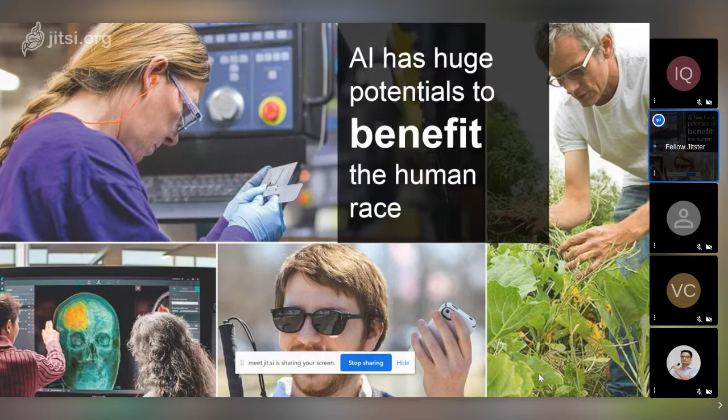So why go very far? Let's take a current example, how AI is combating COVID-19. AI, artificial intelligence, or machine learning, or data analytics, is accelerating the research.

Even before, there were influenza or swine flu like conditions, or pandemics that happened. Having said that, in the current situation of COVID-19, each newspaper, every digital media platform, each news channel, they are completely speaking on descriptive analytics, predictive analytics, on what would be the projection, or prescriptive analytics, how we can take care of things.

And I can proudly say I'm working with one of the Indian state governments to provide all this COVID-19 related analysis. And last week, the Government of India appreciated the work we do for that particular state.

So in terms of combating COVID-19, it performs very well across stages like detection, prevention, response, recovery. In terms of detection, we get early warning, detecting anomalies and digital smoke signals like BlueDot, then diagnosis, pattern recognition using medical imagery and symptom data, etc.

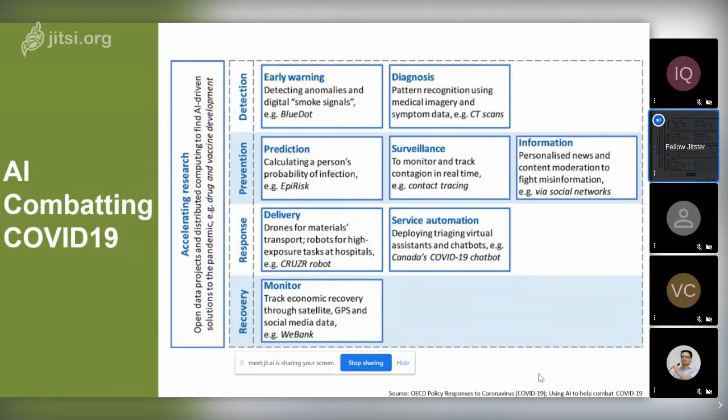So what are the trustworthy AI requirements, the requirements we can trust upon? First is accountability, where there is accountability and AI required, that's trustworthy. Then human agency and oversight, then technical robustness and safety, then privacy and data governance. We need to make sure that sensitive data we are working with should not get leaked. Then we should have transparency, then diversity, non-discrimination and fairness, then social and environmental well-being.

So it needs to be continuously evaluated and addressed throughout the AI system's life cycle.

So that's the clear and crisp trustworthy AI requirements. Now I'll move to the next, much more interesting part. So as of now, we have covered what is artificial intelligence, what we can do with it, and the requirements - whatever situation we are currently facing due to artificial intelligence, we are able to manage our work and manage many things. So that's how AI works.

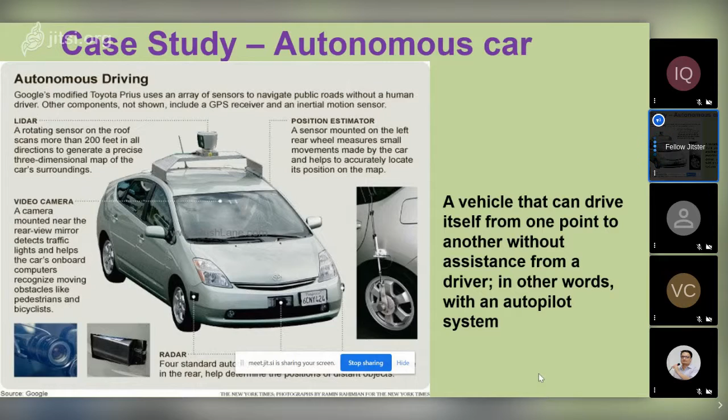Components of autonomous car. First is the GPS. It gives the position of the car using satellite in a map like Google Map. The map gives information about upcoming intersections, traffic report, directions, paths. That's how GPS works.

Whenever we are traveling or walking, if we have a GPS-enabled system like Adidas or Fitbit, it tells us how many steps we have walked, or if we are driving, the traffic report tells us not to go through the shortest route but a longer route if it has the cleanest traffic with no congestion. Then for direction, even if we don't know an address, we can quickly enable Google Map, type the address, and navigate towards it.

Then the lidar, it's nothing but light detection and ranging. It's the heart of the autonomous car. It is a rotating sensor on the roof producing a laser beam that scans more than 200 feet in all directions. It makes a precise three-dimensional map of surroundings.

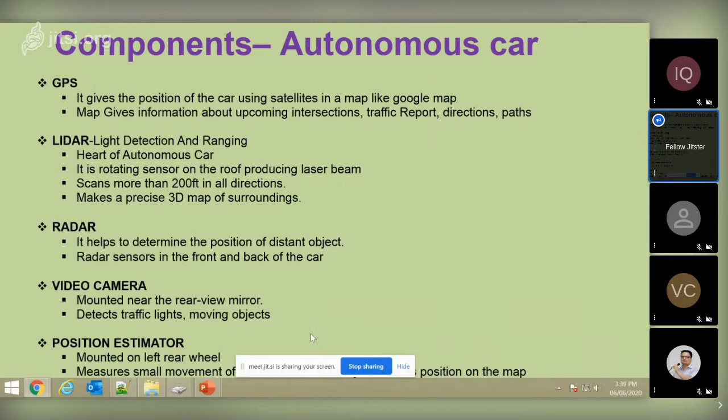Then we can move to the next point. So as a mechanical engineer, instead of fearing, we have to remember: machine rules the world, but we rule the machine.

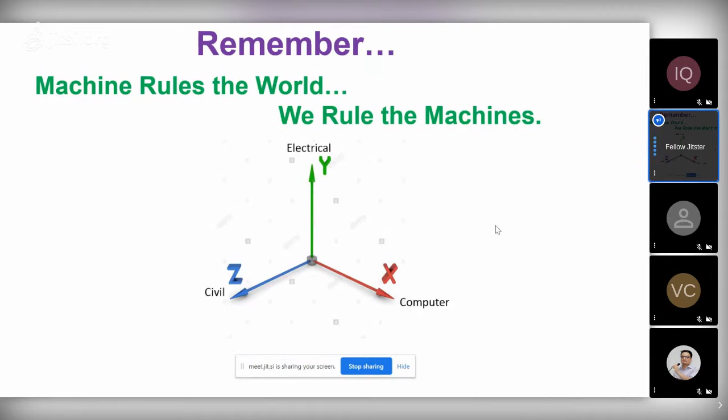If x axis is computer, y is electrical, z is civil, then don't scare - we are mechanical engineers, we are the origin. Mechanical engineering is the origin. When mech rests, world rusts.

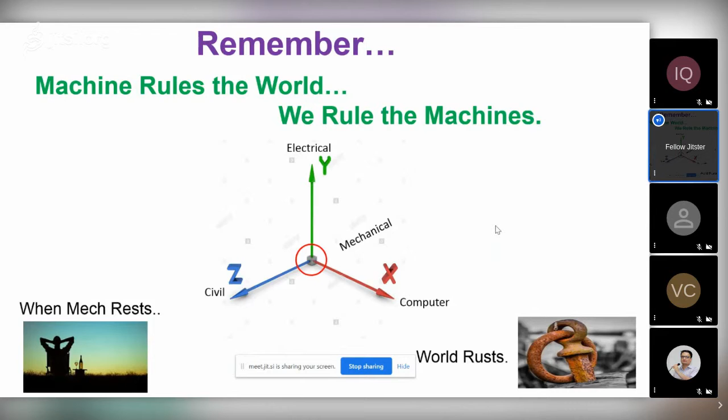So here comes the artificial intelligence section. To begin with, there are some of the top 10 online courses. First is Machine Learning certification by Stanford University, available on Coursera. Then Deep Learning by Andrew Ng, Coursera.

AI for Everyone by Andrew Ng, again on Coursera. Artificial Intelligence certification by Columbia University, available on edX. Deep Learning by IBM, again available on edX.

Artificial Intelligence A to Z: Learn How to Build an AI, available on Udemy. Artificial Intelligence for Beginners, a free course on LinkedIn Learning, the Lynda platform.

Then we have advanced AI tutorials: Deep Reinforcement Learning in Python, on Udemy. Then we have an Artificial Intelligence course on Reinforcement Learning in Python. And another one is the Artificial Intelligence certificate course by Microsoft, again available on edX.

These courses not only give you learning and knowledge about artificial intelligence, but also give you the idea about what are all the different parts of artificial intelligence, what are the basics, along with industry expert services and organizational certificates.

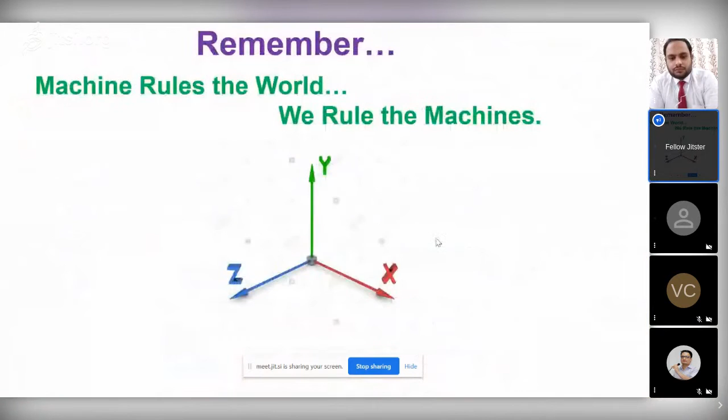Thank you, sir. The next question is: how much time will it generally take to master data science?

There are master programs starting from 6 months to 2 years. It depends on the person, how quickly he can learn. But I don't think it's a lengthy process. Even within 6 months, we can enter into the data science world. What we need is to understand the data, to play with the data, and to build models out of the data.

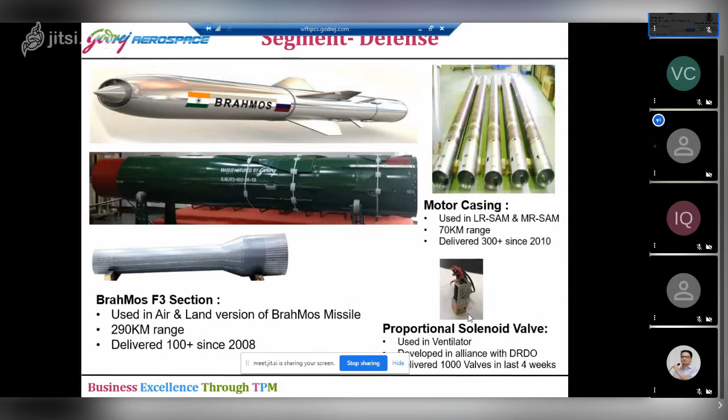Now the second segment is we are manufacturing for space.

We are manufacturing engines for the space program of ISRO, and we have supplied near about 100 plus Vikas engines. Then another 75 kilonewton thrust engine for GSLV. First one is for PSLV vehicle, and third one is the CE20 engine, which is also very huge thrust, 200 kilonewton thrust powerful engine we manufacture.

And now the semi cryo engine, which is 2000 kilonewton thrust, is under development in our plant. So you can see all the PSLV, GSLV vehicles successfully launched the space program of ISRO, and we have pride that in Chandrayaan and Mars mission our engine worked successfully with the parameters decided by scientists. So for these programs, Mr.

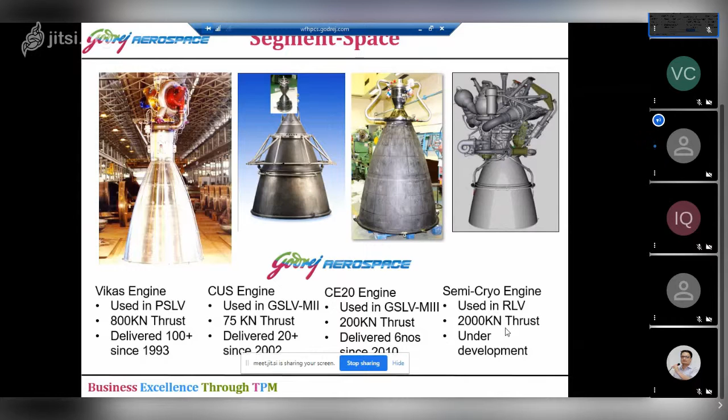Abdul Kalam also visited our company, and that is one of the pride moments for us. Then the third segment is the domestic and international aircraft business, where we are supplying the precise assemblies which are in the slide - the tubing for aircraft, actuators, brackets, sheet metal assemblies, pod assemblies. Rafale is one of the super aircraft, and in that the pod assembly is fitted. So many areas we are working in.

Now we just entered the composite segment, because the metallic manufacturing is different, but now in the latest technology of aircraft this segment is very important. We entered into that. Now recent development, you see this actuator - that actuator is a very important part of the Tejas project. We supplied the actuators and they worked successfully. So indigenous actuators we are now manufacturing, and they are supplied to defense.

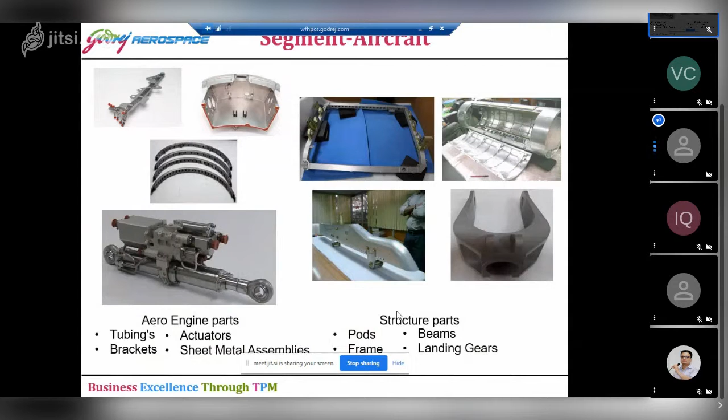So it is very proud to work here in Godrej. This kind of prestigious product we are manufacturing under visionary leader Mr. S.M. Vaidya, who started this division and grew it from 2-3 engineers and a small group. Now it is 700 plus people we are working together with expertise in manufacturing, where we are expert in process designing and process architecturing of precision parts manufacturing.

We have a huge customer base. We are supplying to ADA, ISRO, HAL, BrahMos, Bharat Dynamics - like that we are supplying to Indian prestigious companies where research scientists are developing the products which are manufactured and supplied by us. At the international segment, we are working for very prestigious customers like Rolls-Royce, Rafael, Moog, Safran, Honeywell, Boeing, Eaton, and GE.

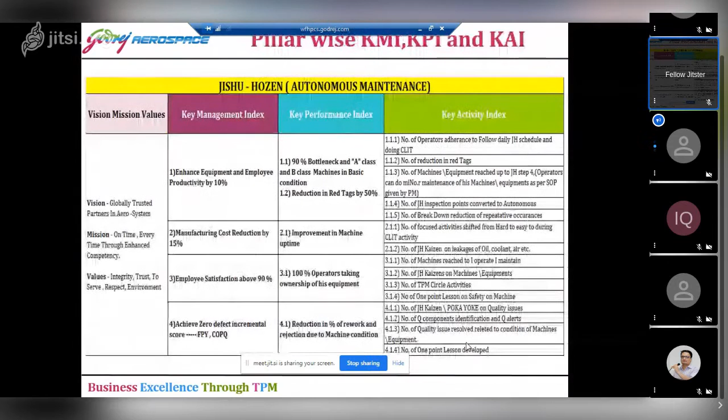All those activity indices are part of the KRA goal of people at the TPM circle level and at the management level, and those are all reviewed weekly, consistently supporting people to improve in that area.

In TPM, the target setting process's main targets are in terms of PQCDSM -- those are the measuring parameters. In PQCDSM, we recorded the existing condition, because we know the philosophy that whatever can be measured can be improved. If we can measure something, then we can improve that thing. On that basis we mapped the world level targets, the benchmark, and what the target should be.

Then we prepared the master plan to implement TPM. This master plan, which we prepared in 2009, was implemented as it is -- there was no pushback, backlog, or change in the plan. Nothing happened differently; whatever we thought in 2009 Q3 was implemented exactly as planned. That kind of dedication and commitment was shown by our people.

To engage 700 people in one go, and to make them think in terms of dual responsibility terminology, was a very challenging thing.

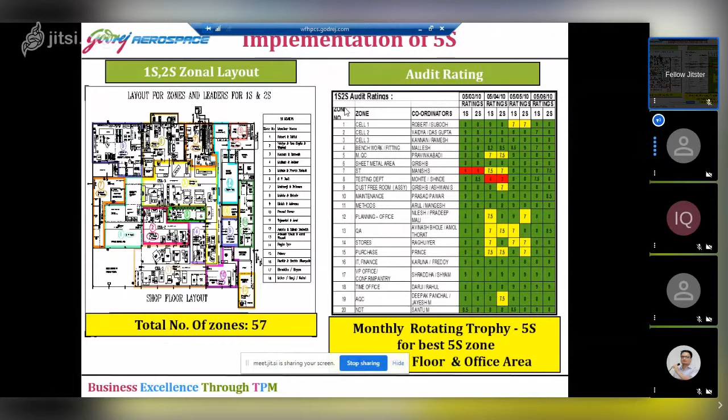So there is no man's land in our company. Everywhere we know which is the area and who is the owner. That is very easy for management to monitor the things.

Now, whatever available resources we have, we done 1S activity, the unwanted materials removed, and developed systematic arrangement for keeping the tools. So tools in shop floor, we have more than 10,000 fixtures, different type of fixtures and tools, and gauges, templates. We are using it in very huge quantity. So to identify and keep all those required resources, and it should be available in good condition, that was the requirement. So 5S was very helpful for us to achieve that.

Then first pillar is Jishu Hozen pillar. It is autonomous maintenance pillar, or in Marathi we are saying it is Swayam Dekhbhal. So how we are taking care about our body. Our body is also one of the machines. So we are very conscious about our body.

But on which machine we are working, whether we are very connected with that machine, that level of ownership to develop in the people, that was the challenge, and we successfully implemented that. Our people now think that I operate, I maintain, I make, I fix. So the minor maintenance people learned to do. So that kind of change happened because of this pillar implementation.

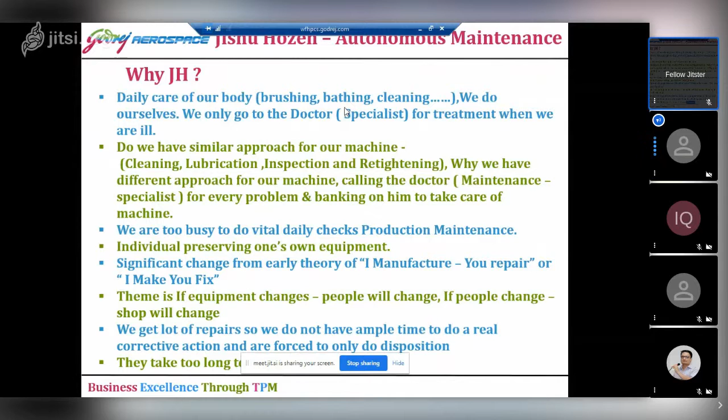One or two machines we retrofitted, because those machines were very old, 35 years old. So management took decision to bring that machine to zero breakdown level. We invested something, and we achieved zero breakdown on those machines also. So this is the manager model machine.

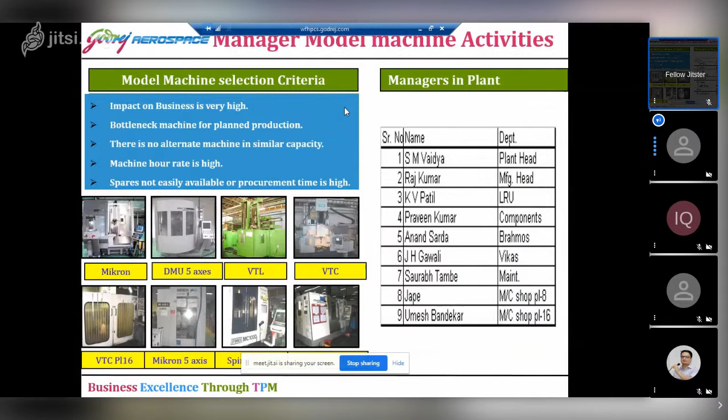Manager first, from our top management, the entire DMC worked on those 8 machines. You can see all those are model machines, where we learned the concept and terminology, and understood how to take care of the machine. As per the JIPM, JH pillar standard, we learned the things, and that same thing we percolated down, and the people learned and adopted the knowledge and skill to take care of their machine. So this is the model machine activity.

Now JH pillar, the ownership of the operator to take care of CLIT activity. So cleaning, lubrication, inspection and tightening. These four things are very important as per JIPM standard. JIPM says that if you continuously monitor and continuously take care of the machine with this CLIT terminology, then your machine will not go for breakdown.

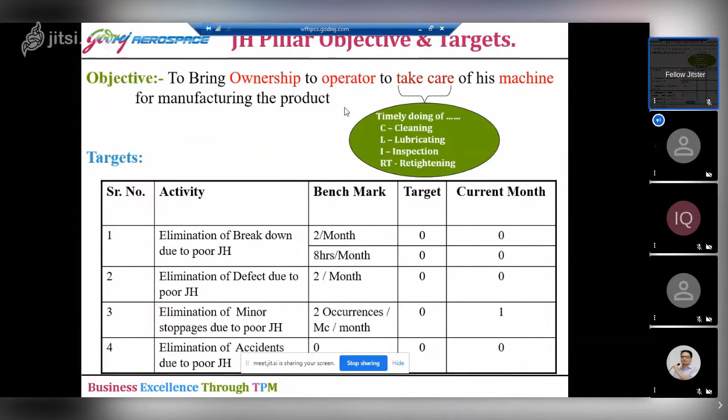It will be at the basic condition, and if you do more on that machine, it will reach the optimum condition. So the machine builder even doesn't think about that machine's condition, but that level of maintenance condition monitoring you can maintain on that machine. So it is a step-by-step terminology.

In every pillar, there is a team of people. In JH pillar, all the machine shop people are participating, where on every machine, old or new, we are implementing 7 steps. Those 7 steps are step-by-step implementation: initial cleanup, countermeasure against sources of contamination, formulation of CLIT standard, overall inspection, autonomous checkup - all those steps are implemented on the machines. And the JH chairman certifies the machine, and we are monitoring it again and again with those steps. So till step 5 we implemented on most of the machines.

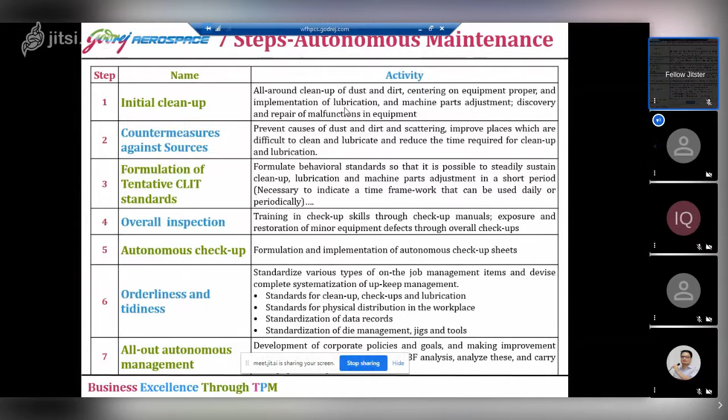Here you can see some examples, there are 7 types of abnormality as per JIPM standard: minor flaws, unfulfilled basic condition, inaccessible places, contamination sources, quality defect sources, unnecessary non-urgent items, and unsafe places. So once you open one of the machines or equipment, you will find out those kind of abnormalities in the machine, which were not there when the new machine arrived in the plant. At that time those things were not there, but because of people's behavior, habits, or ignorance, so many reasons are behind that the machine is not taken care of as per the machine builder specified requirement. So the books coming with the machines are kept in the locker in the cupboard of the maintenance department, and they are not aware and not interested to maintain the machine at zero breakdown level or condition mode.

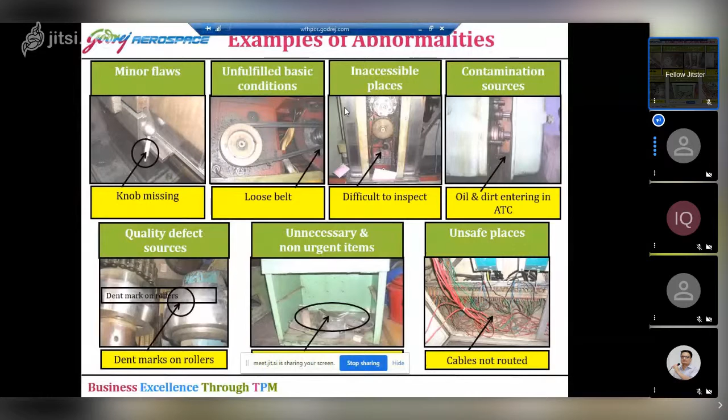So you can see a lot of abnormality we observed and corrected - near about 3,500 abnormalities were corrected, roughly speaking. So maintenance department and production people did a tremendous task at that time.

Then good-to-find cases - there are some abnormalities related to 3 bad: breakdown, quality, and defects. Breakdown, accident, and defects - so these 3 bads should be controlled. If we ignore all those 3 bads, it will lead to machine breakdown.

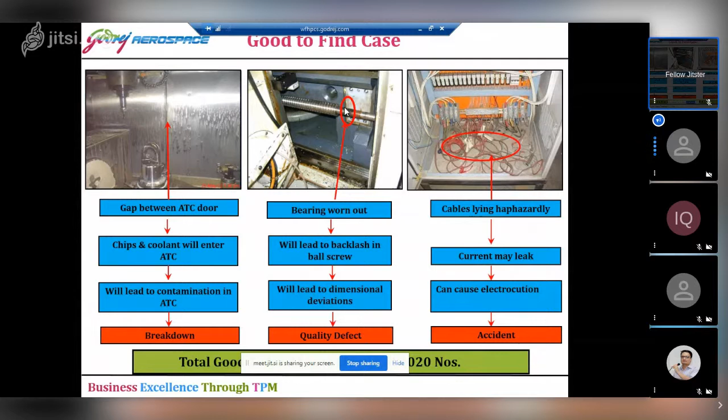So timely responding to the condition of the machine is one of the important factors. Good-to-find case is one of the areas where we found a lot of things in the machine that were not taken care of earlier, because of lack of knowledge or lack of policy - we didn't have that much stringent mechanism. But because of this TPM implementation, we developed a structured implementation plan. So now if a problem comes, we know what the solution is and how to, who will take care and who is the owner of that problem.

So sources of contamination is one of the areas where the contaminant is. The reason behind failure of machines or equipment is because of contamination. The things flowing in the machine should be channelized properly. If some oil or some chips or some dirt is accumulating in an area where it should not go, that is the contamination area, and that source of contamination should be arrested.

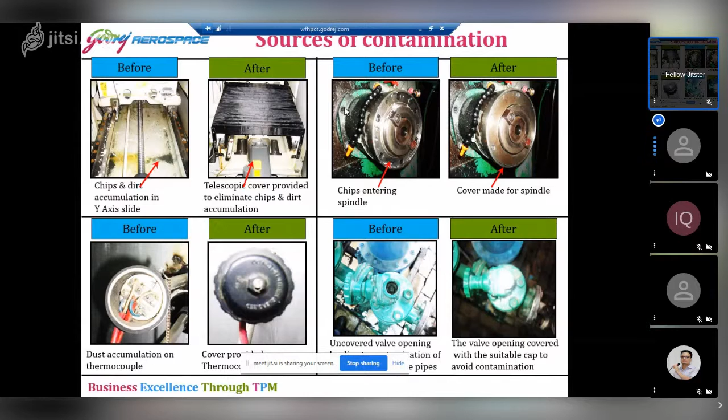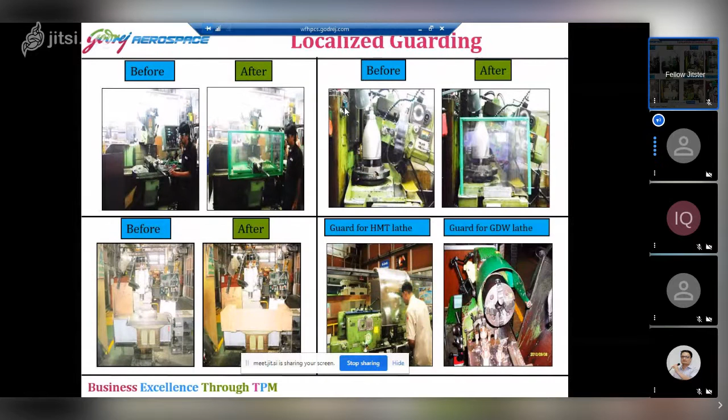So next step is countermeasure against sources of contamination. Then we design and develop some localized guarding, so the cleaning time and safety precaution is improved in the machine.

Then visual indicators. Now on the machine, the person was not aware of what he should do. He is aware of operating the machine, but not competent enough to understand how to take care of his machine. So those visual indicator stickers are pasted.

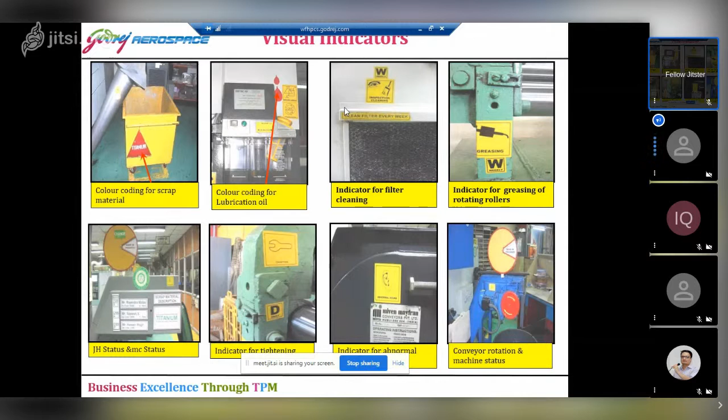The list of daily JH checklist we prepared, and that checklist is designed as per the machines and with maintenance people's help, and that was implemented on all the machines.

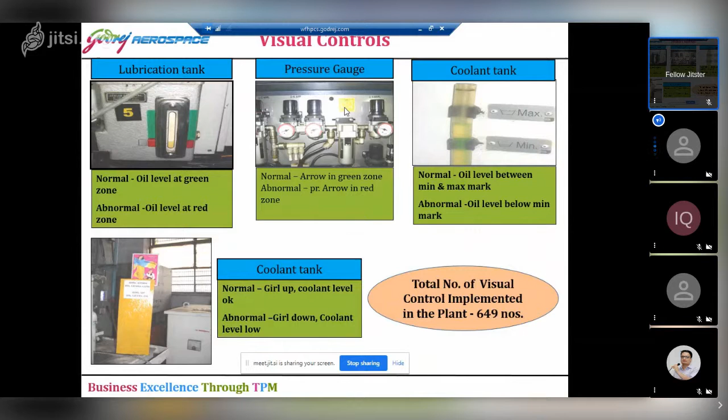Then visual controls - there are inbuilt machine controls in the machines, pressure meters, or upper-lower level indicators in the machine. So those indicator markings should be clear and neat. In the daily round, the operator will observe and note down if the oil level is low, then the action for him is to pour in the oil. So that kind of improvement we did on the machine.

Visual management - those are some improvements that were not in the machine as provided by the machine builder, but our people developed this visual management, and that was one of the creativities. They said that because of that creativity, their attachment with the machine and involvement was improved.

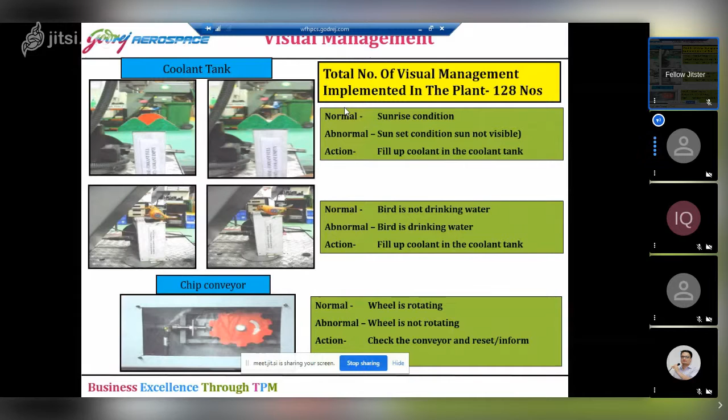Then those are the audit points. If the machine passes, the JH chairman will sign that the machine has passed step 1 audit. Like that, step 1, step 2, step 3 - the auditing process is established in the company.

Then JH step 4 - in step 1 to step 3, the operator changes the machine and machine condition, but from step 4 onward, the machine changes the operator's mindset, because the operator's competency enhancement program is started. The operator was given 7 trainings: fasteners, drive mechanism, hydraulic, pneumatic, bearings, basic electrical safety. Those kinds of topics were taught by experts. So we created a dedicated training center in our plant, and all the people were educated.

Now we created some models. On those models, people understand the hydraulic and pneumatic mechanism. So this is one of the formats we - JIPM recommends - the 'know-why' sheet. Why is there a breakdown? We should know this breakdown is because of this reason, that it was not taken care of with the appropriate requirement, and the standard procedure was not followed.

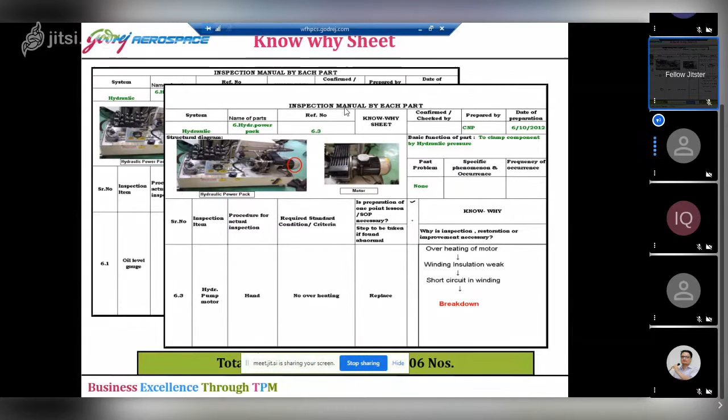So it is related to breakdown, quality, and defects also, and safety also.

The second pillar is the Kobetsu Kaizen pillar. This pillar is the backbone of TPM, where we measure the overall equipment efficiency, overall human efficiency, and overall plant efficiency. There are standard measuring parameters and calculation tables available.

We should establish the system of data collection in the company, so we established a strong data collection mechanism. In our ERP system, we enter all the data through 8-hour booking done by people. We extract that data into an Excel sheet, and one Kaizen or improvement done by me and my colleague was setting up a macro on the Excel sheet. By pressing one button, we get all the OEE data of the machine, whether for a group of machines, daily, weekly, monthly, or whatever time range you decide. So manual calculation is eliminated.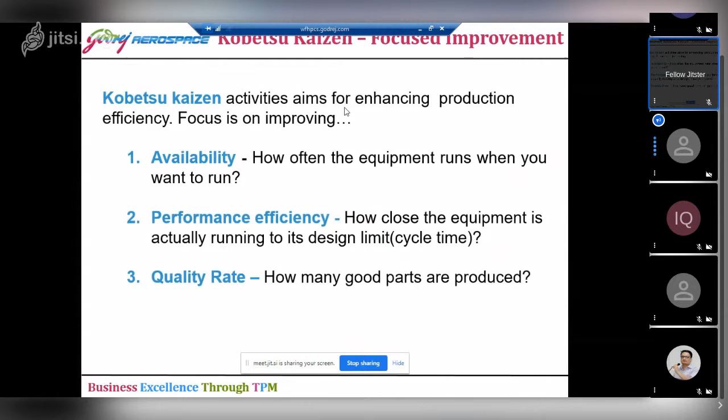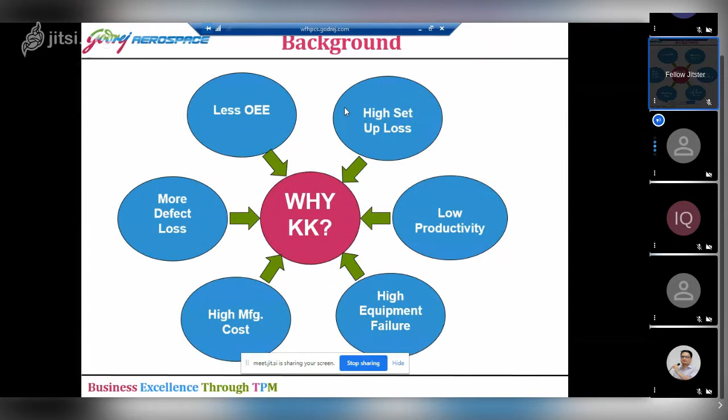Why is the KK pillar implemented in our company? Because OEE was less, setup loss was high, productivity was low, equipment failure was high, manufacturing cost was high, and defect cost or defect loss was high. These are very important factors we should monitor.

The objective was to maximize equipment efficiency for carrying out the process at reduced manufacturing cost, because we are in a project-based industry environment where things are not well set. We are establishing the parameters in the process architecture. Every time, the challenge was that the cost of the process, in all aspects - variable cost, consumable cost, fixed cost - every cost is very crucial for us. Because of this KK pillar implementation, to some level we achieved control on the cost through cycle time monitoring and non-value added activity monitoring and control.

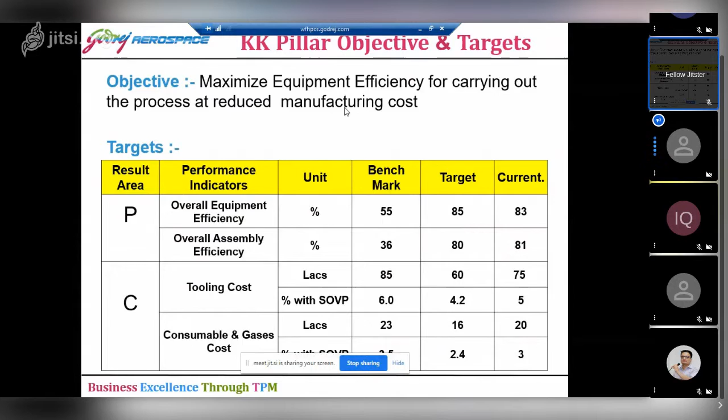You can see this is the standard table given by JIPM, Japan Institute of Plant Maintenance, where all types of losses are captured in 16 types of losses, and their relation with a particular pillar is shown.

So losses 1 to 7 are affecting the overall equipment efficiency. If we control or monitor continuously and improve the things, your OEE will improve. So those 7 losses are very important in the company. If you are going to implement the KK pillar, those 7 losses should be taken care of.

KK sir requested that I talk on this topic in more detail. Equipment failure loss - if a machine breaks down, it will directly affect the top line and bottom line cost of the company. Then there's setup and adjustment loss - without doing setup, we can't produce anything, so setup is essential.

But what should be the setting time on the machine, or whether we can set offline, or develop and implement a quick change or automatic setting mechanism on the equipment or process - that is the process architecture level we are thinking about.

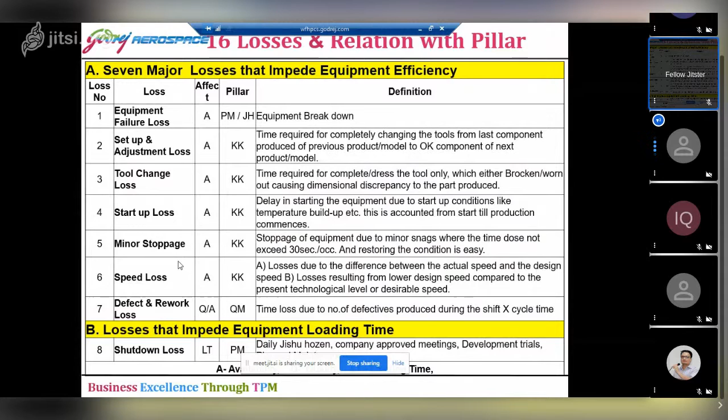So metrological quality control and quality assurance on the equipment, equipment audit and specification compliance, and also machine calibration in all aspects, whatever is defined by expert, should be ready to produce that component. So it is very well controlled.

Then those 5 losses which impede the workers' efficiency. Here automation, improvement in housekeeping, or relayouting, some kind of improvements we have done. Because of this, our operators' efficiency is improved.

Workstation development, because in assembly... hello, whether I am talking, can you hear? Hello, yes sir, yes sir. Yes, can sir, yes, continue sir. Please, okay sir, you are audible. No problem, go ahead please.

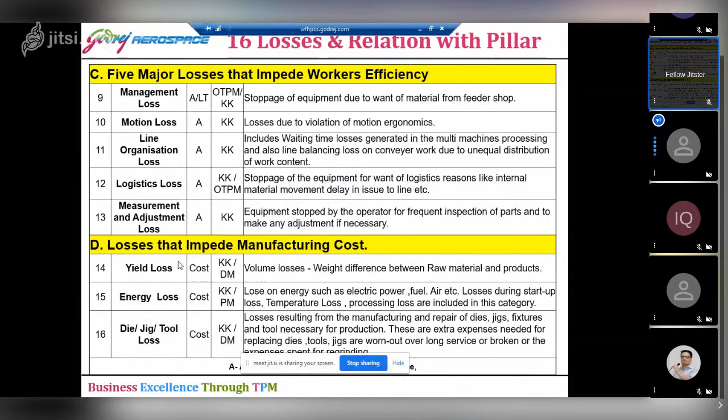Okay, then a very important aspect of the loss is yield manufacturing cost. Cost is very important in the company - fixed cost, variable cost, and consumable cost, manufacturing cost. So many cost parameters are there which need to be controlled by management. It is challenging that where we are spending more, that area should be identified, and at every micro level we have a strong data collection mechanism, and we are continuously improving on those parameters which are not in our control.

Then the approach for implementation of the KK pillar is: target setting, then draw the plan, then analyze the problem and draw the improvement plan, then implement the plan which is decided, then check the results. The results should be as per our target, so against our target, results should be cross verified.

And once an improvement is frozen, you should think about where we can do horizontal deployment, so where the scope for horizontal deployment is there. Another aspect is sustenance - once you achieve something, you always think for sustenance, that it should not deteriorate.

That was the thinking, that is the philosophy. Then this is the loss tree, where overall equipment efficiency consists of rate of availability, rate of performance, and rate of quality. In those areas, in our company, in an initial study on one sample machine we studied - this slide is related to the Micron machine, Micron 1000, where we got statistical data and found that the setup and adjustment loss was the highest parameter in our machine.

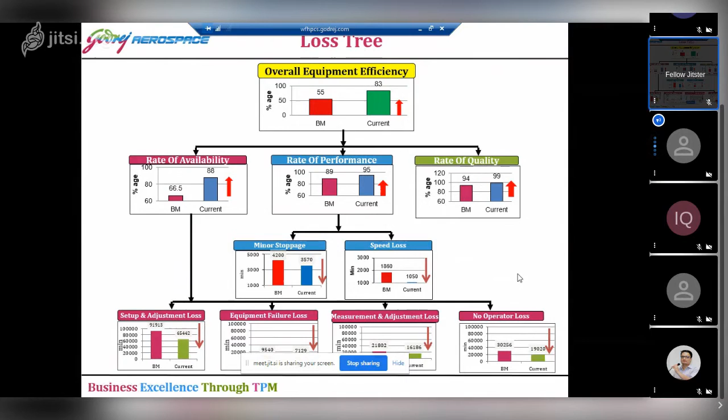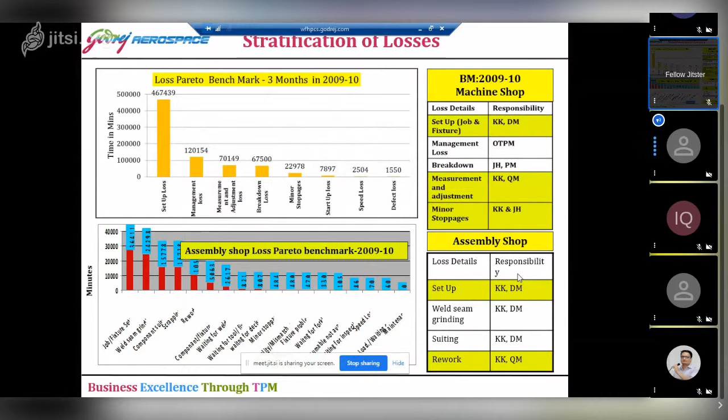So we targeted to control the top 5 losses on that machine. This is the stratification of losses, which directly came from our data collection mechanism, and we plotted it in the graph - setup loss, management loss, measurement and adjustment loss were the highest. Step by step we controlled all those losses on the machine.

So here is one of the setup and adjustment losses - how we further worked on controlling setup and adjustment loss. This is the slide. Then the approach for setup and adjustment loss - we implemented the ECRS methodology, and another one is SMED.

ECRS is elimination, combination, reduction, and simplification. So we identified which activity falls into which category, and accordingly our corrective action or improvement kaizen or focused concentrated kaizens were implemented, and then we cross verified with the target set by our management. Some SMED projects we implemented.

Here you can see 24 projects at that time we implemented of the SMED type. So it is not directly about dies in your syllabus - whenever we talk about the SMED concept, the picture shown was of changing heavy dies from press machines, but that is not the case here.

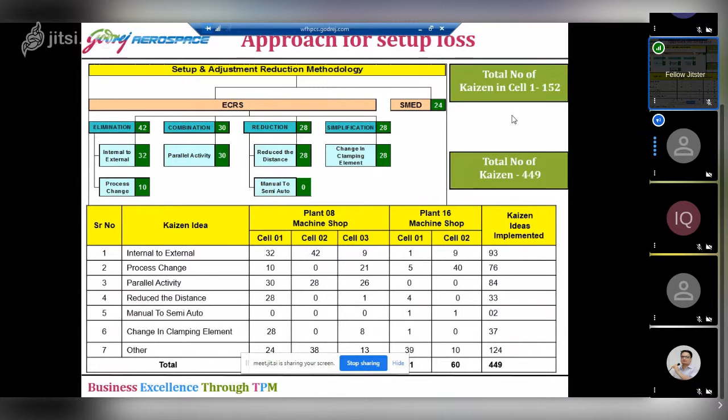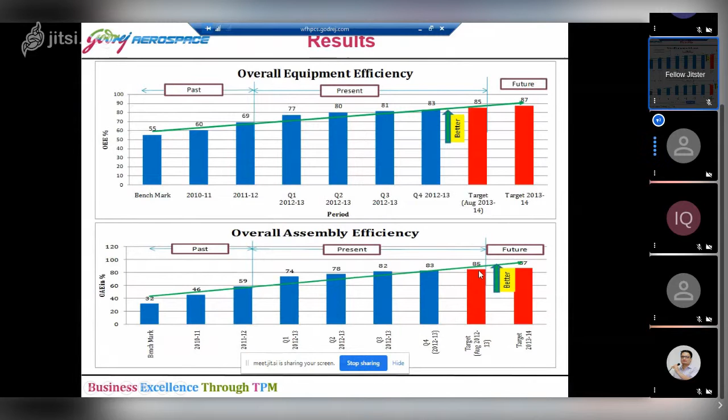Then we monitored overall equipment efficiency and overall assembly efficiency in the plant. You can see that we achieved from 55% to 85% in overall equipment efficiency, and in human efficiency or assembly efficiency, we achieved 32 to 85%. So TPM was very helpful for us to improve things.

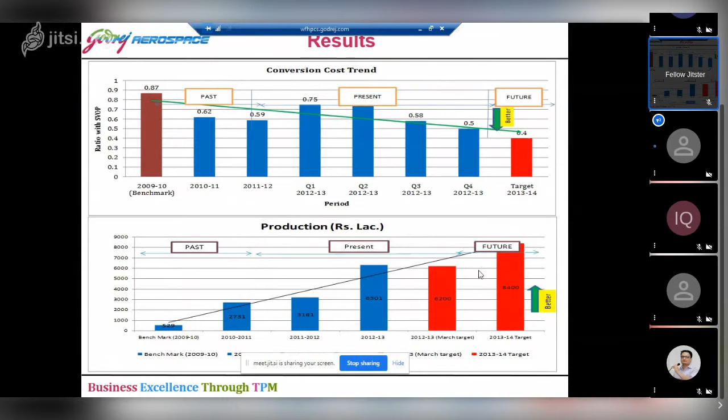Here are some results related to cost and finance, that production cost. Then next pillar is the PM pillar, that planned maintenance pillar, where the objective is to ensure the availability, reliability, and maintainability of the equipment to reduce the maintenance cost.

Maintenance cost should be zero. That was the target, but that is not possible because we have a huge number of machines. So maintenance cost should be controlled, not at the higher end, because it is a non-value-added cost. It is a variable cost.

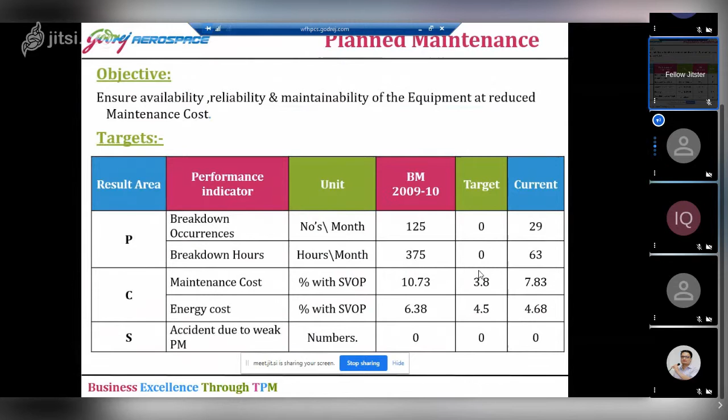So we established, as per TPM terminology, the 10-step implementation methodology, which is designed by JIPM, and we implemented it in our plant.

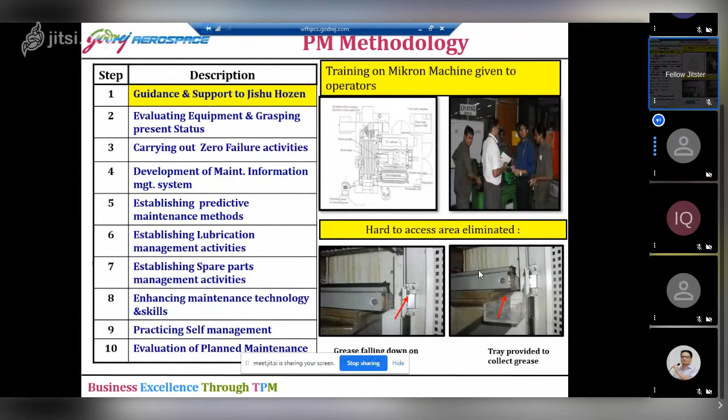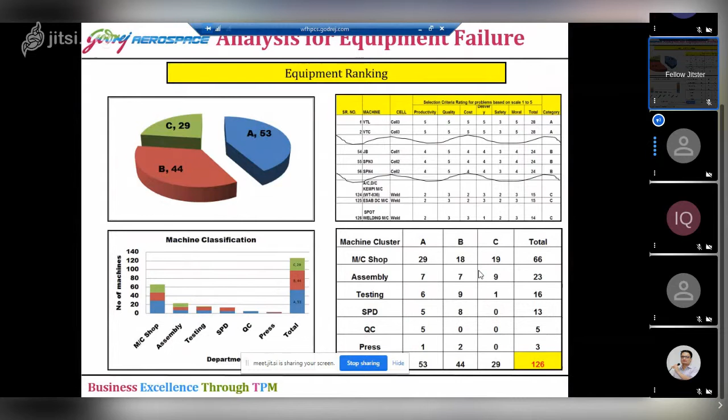The analysis of equipment failure - every failure is a learning opportunity for us. That was the philosophy, that in every failure we have done a deep dive analysis of why the failure happened on the machine and exactly what was the reason.

So you can see this 5 Why analysis. Normally 5 Why analysis is done from the problem side, but in this PM pillar, the 5 Why analysis will be done from the solution side - why the play in the ball screw, then what is the reason. So that kind of thing we've done.

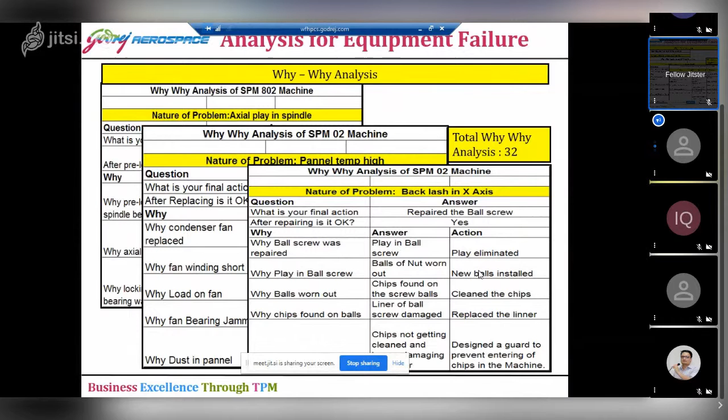We have practiced that all breakdowns will be analyzed by the maintenance team. We have an ERP system to collect maintenance related data, so that we can get data from the system - MTTR, MTBF, mean time between failure, mean time to repair, number of breakdowns on the machine, or type of breakdown on the machine. So many micro level parameters we are monitoring, and that data is available in the system.

So to build the history of the machine, after 5 years if we evaluate the machine, we will find out exactly the reason, or what parameter is not taken into account in the machine - whether that is weakness of the machine design or weakness of management control. That will be analyzed, and as a final result we take action to control the things.

Here in maintenance cost reduction, we have taken up projects like spare part management, that is inventory management of spare parts, and second aspect is labor cost management - internal and external, where internal labor is the number of laborers assigned to the task, and external is the subcontracting of maintenance given by us. So that is also something we started controlling.

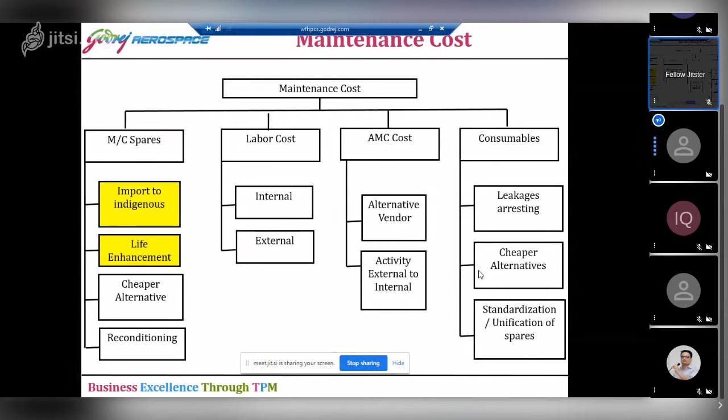Then consumables, the leakages in the machines, and cheaper alternatives or standardization, unification of spares - we develop indigenous spares, so no foreign imported spares required, because imported parts cost was always high. So what alternative resources do we have? We established suppliers for similar specification parts in the company. So that was the control on spare part management.

Quality management is one of the very huge and big topics. If we talk 2-3 days, it will not complete, because quality management itself - you can see so many excellence tools are based on this quality management. All of you in academics learn about Six Sigma, one of the very popular tools for quality management.

So in the aerospace sector, if we relate this quality management, we are working for 100% quality. There is no scope for defect, rework and rejection. We are not repairing and reworking the things. Once we manufacture, 'first time right' is the terminology. So if the parameters are not achieved the first time, that part is not useful for us to deliver to the customer.

So you can understand that the components are very complex. The process architecture is very tedious, and the material given by the customer was very exotic, like titanium, Inconel. So material cutting is also very challenging in our company, and to achieve the surface finish and standard or specified parameters is one of the very big challenges.

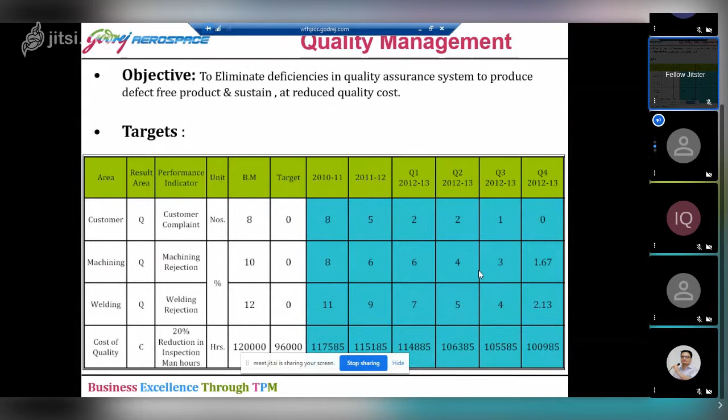But we established in the system in our company that we can achieve 100% compliance of quality. If a defect occurs, we are not saying there should not be any defect. Maybe there will be some reason. Because of that, once a defect occurs in the system or component, we classify it in A, B, C category. In depth, you can go to Google and study, because this presentation is very long - this is ready-made available data on Google.

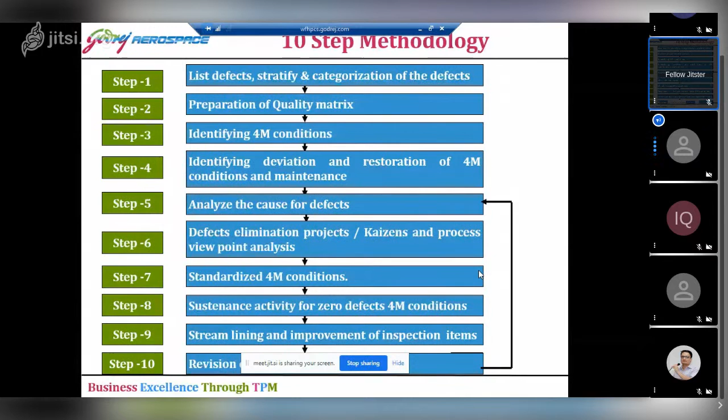We implemented a 10-step methodology for the quality management pillar. Our people are doing 8D analysis for quality defects, applying 7QC tools and 8D analysis. This deep dive helps strengthen our existing process, and feedback is given to manufacturing engineering for changing parameters, design, tools, fixtures, machines, or equipment. So a continuous monitoring system is established in the company.

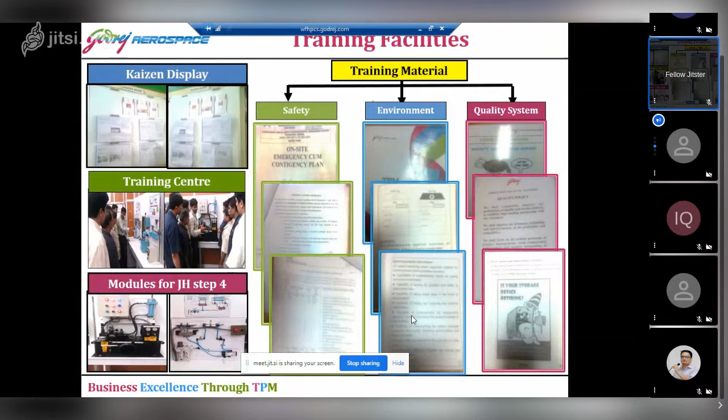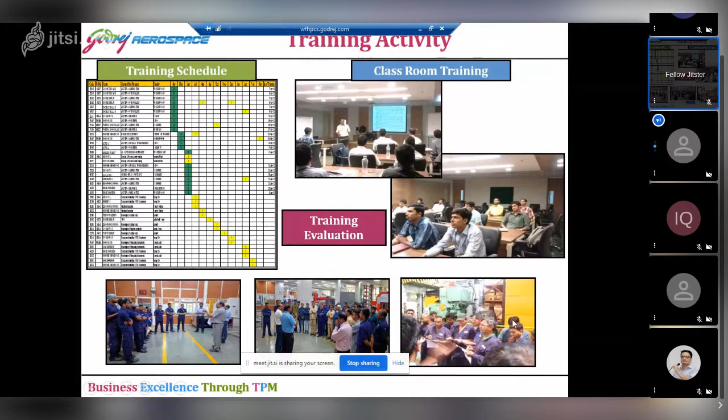So for that, education training is one of the very key areas. We established a TPM training center at that time. We kept training records of how many people were educated. We've done several rounds of classroom training, then shop floor round training. You can see here we are educating people at the shop floor. It is an ongoing, continuous activity so that people are always connected with the topic and always eager to learn new things.

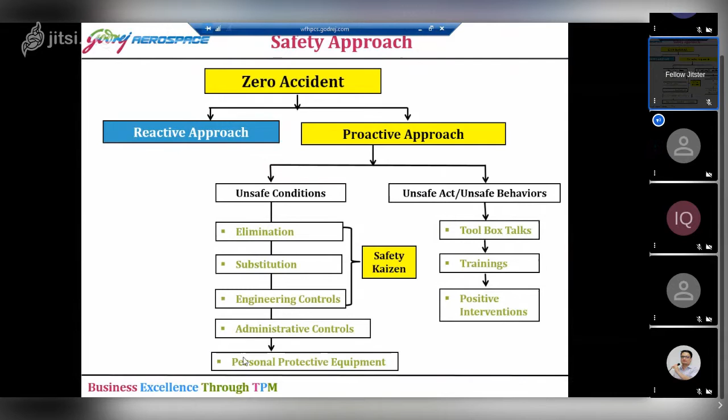Whether I am audible, Kulkarni sir? Yes sir, yes sir, you are audible sir. Please go ahead. How much time is required to conclude, sir?